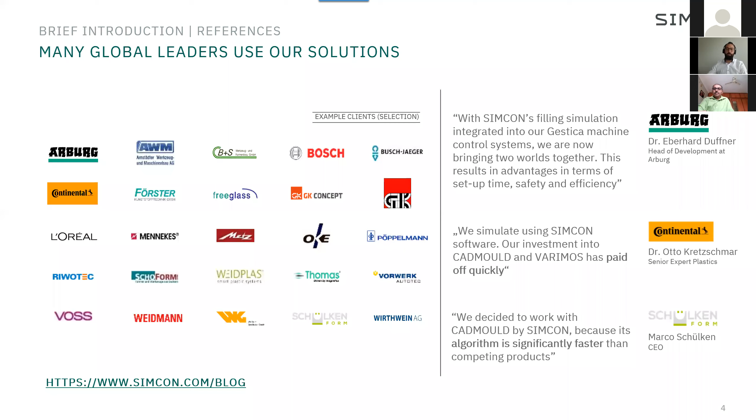So one of the next slides will show you what you will see today. We'll show you today how to combine simulation and optimization tools to really improve your injection molding results. And that means you should not only have the software on your side, but you should really use it in a proper way. And that is why I would like to show some things about it.

So we have CADMOULD as a simulation tool, and we have VARIMOS as an optimization tool. With CADMOULD simulation, you can, of course, already anticipate results very early, identify your issues, like, for example, weld lines, air entrapment, short shots, like warpage behavior. You can really see if the part you would like to produce will have the quality you will need, or if it will not have the quality.

And you can, of course, virtually try to do improvements. That means you can try to change the processing parameters. You can try to change maybe the wall thickness, so the design of the part, the mold setup. So you can try different things and will receive a new result, which might be better or which might be worse. With VARIMOS together, we will have an automatic optimization.

So that means VARIMOS will automatically search the optimized settings, the optimized solutions for your product. And that is something which is very important today, that you don't only know if your result will be good enough. No, you need to optimize it, of course.

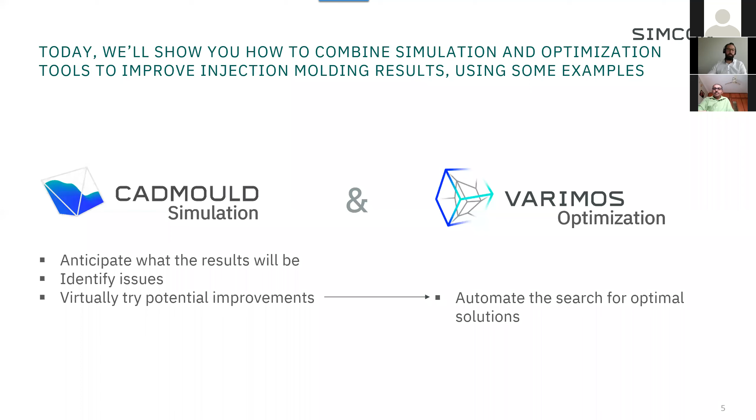I would illustrate it on an example, because that's the best way to show it. We will illustrate it on two examples today. We will have on the left side an example of a drink dispenser from company Brita. So it will be not the drink dispenser, but it will be the filter on the drink dispenser. There we did a geometric optimization, especially on the warpage behavior.

And on the right side, you can see a glove compartment. This is a part which is done in a natural fiber component material. And we will see what we did in a project, because in a project we developed the fiber orientation model. We did some thermal optimization as well as some filling optimization. And those are the two parts where I would like to explain to you the possibilities of simulation and optimization.

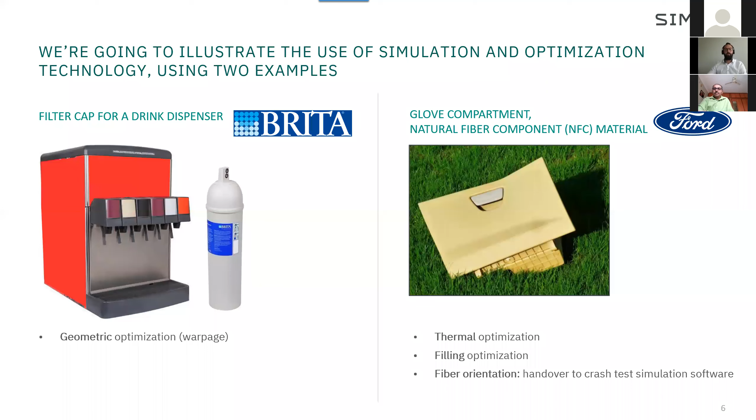For the first example, the Brita case study with these filter parts. What you can see is you have a filter which is used in many drink dispensers for the water purification. And this filter is a pressure sensitive part because the water needs to be filtrated, and it could have a high pressure, and therefore the part, of course, needs to be designed in a very good way, and it needs to resist the pressure.

We have very tight tolerances, especially due to the reason that this filter is built up by two parts. So you have a bottom part and a cap, and these need to be welded together. And that is something which we will see in the later slides, which caused some issues, and where we helped to optimize this part.

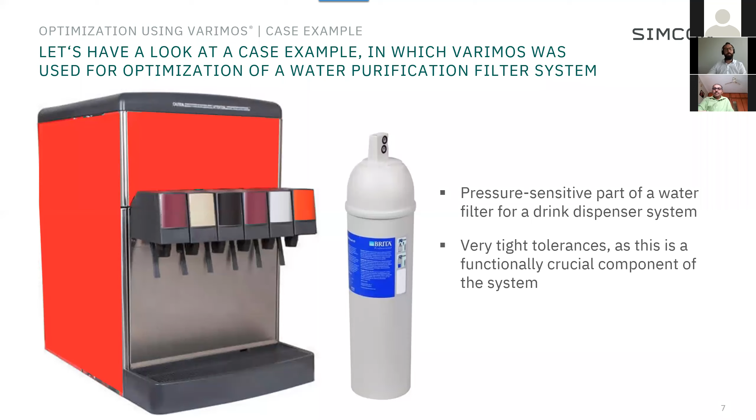So the challenge was we had a crucial part in the filter cap which was turning out distorted, which had too much warpage, and we saw that it was probably due to the unbalanced filling. So you can see that the parts are not filling balanced. You have an unbalanced filling.

You can see it on this side: this area of the flow front is not matching with this area of the flow front. So of course, if you inject from the center of the part and the part is not symmetrical at the top, you will not have a symmetrical filling at the bottom. The issue was that due to the fiber reinforced material, the resulting parts were too oval. They should normally be perfectly round, but they were not.

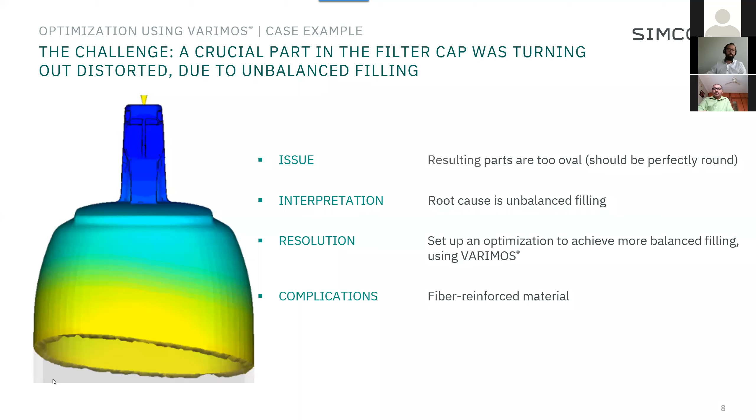Why do they need to be perfectly round? Because they need to be friction welded. So they need to be welded, and then it is a big issue when the parts are not round. So we had to solve this issue by simulation and try to find a solution where the thing can be balanced. To do this, we used VARIMOS, and therefore I would like to show you how VARIMOS can help you to optimize the geometry.

I will guide you through these steps which you need to perform, or which mainly are performed automatically by VARIMOS, and show you what will be the outcome. So first, you need to set up your optimization, of course. To set up your optimization, you can define targets, for example, the balanced filling. You can define free parameters, and you can define constraints, for example, maximum injection pressure, maximum clamping force, or something similar. The free parameters in this case were the geometry, so the wall thickness of the part. I will show you later.

Then you have some steps which are automated by VARIMOS. That means as soon as you have set up the optimization, VARIMOS will automatically set up a DOE, so a design of experiments, to do some simulations in the background automatically with CADMOULD. So it will simulate many variants automatically and get the results. And these results of the different variants will be taken into a mathematical model. And this mathematical model will be able to predict the best geometry distribution or the best wall thickness distribution in this part to reach a balanced filling.

So something which you could do manually, of course, to test different wall thicknesses will here be automated and will automatically give you the best result which is possible. Because even if you find a good solution manually, you're not sure that it will really be the best solution which is possible. So the computed optimized processing parameters, or in this case, geometry features, will be delivered to you.

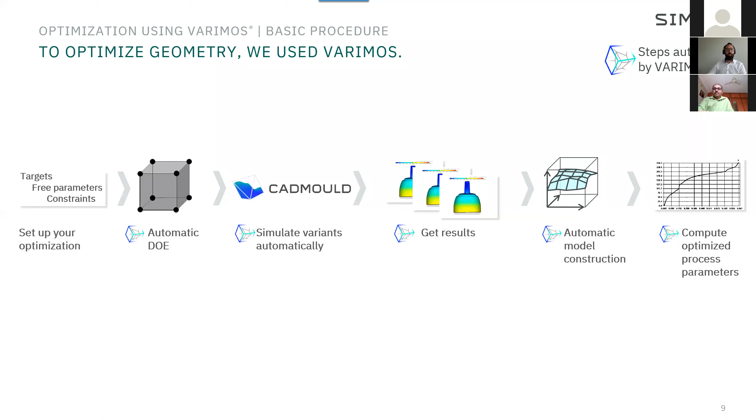So just to explain a little bit more detailed, for the optimization, you can flexibly define targets, constraints, and free parameters. So that means the system is not giving everything automatically, and maybe you are not finding your right targets, but you can define them. So the targets could be, of course, everything which is the outcome from a simulation. So it can be the geometry deviation, can be the cycle time, as we heard today already, that the cycle time is, of course, in today's production, one of the important points. Could be the temperature, the material usage, or anything else which is a target or a result from the simulation.

Free parameters which can be varied and optimized with VARIMOS in order to find a solution are all parameters which can be changed in the simulation. And in the simulation, if you compare it to the real mold existing on the injection molding machine, you have a lot more parameters which can be varied. So it can be the wall thickness on the injection molded part. It can be the location of the cooling channels, can be the runner system, can be every process parameter. So things you will not try on the machine, or you cannot try on the machine because you would need to build a new mold, can be changed in the simulation, of course.

So that means if you begin earlier in the product development process to optimize, you will have a better mold in your first production trials. And of course, there might be some constraints like some temperature restrictions, like some clamping force restrictions, which can be a limitation for your optimization.

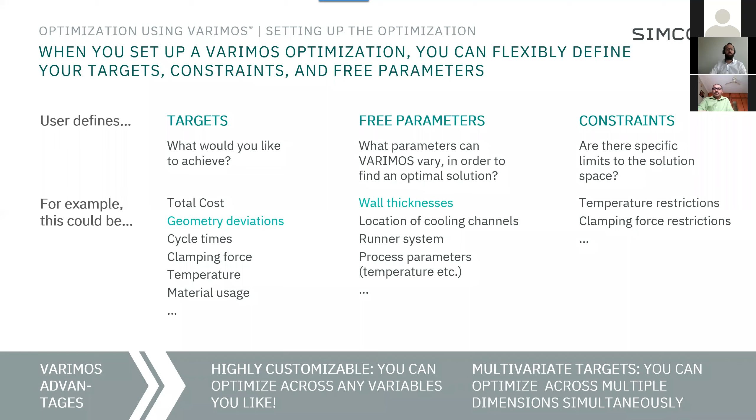That means the special advantages of VARIMOS compared to just simulation or compared to any other system are that you're highly customizable, so you can achieve your targets across many variables, and it can have multivariate targets. So also the targets you would like to fulfill are not limited, and are only limited to the results you can achieve from a simulation, but those are many results today.

So let's have a look how we defined the targets, especially on this part. So on this part, we defined the targets with some sensors. We wanted to have the flow front reaching these sensors at the same time. So that was our target, because if we reach these sensors at the same time, we will have a balanced filling. So, easily explained, those were the targets of the optimization.

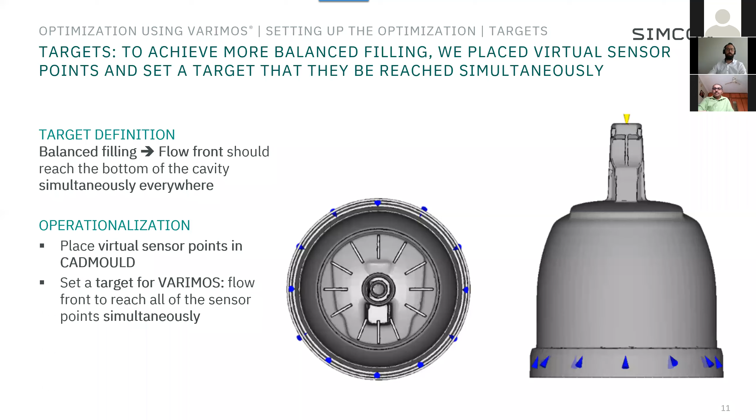Of course, now we need some free parameters. In this case, we defined as a free parameter some areas where the wall thickness was allowed to be changed. So we defined some groups on the part. Like you can see 1, 2, 3, 4, 5 groups on the part, where it was allowed for the optimization system to change the wall thickness, for example, plus minus 0.2 millimeters. And then in the background, VARIMOS was running these optimization runs with CADMOULD and giving out the best result.

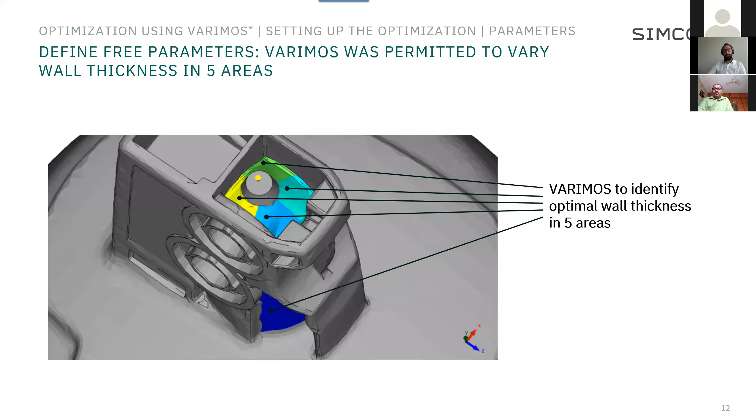There's one important point. The more parameters you change or optimize, and the more targets you would maybe like to have, that takes a lot of simulations in the background. Here, CADMOULD is showing its very unique selling proposition, because CADMOULD is the fastest simulation tool on the market.

That means the simulation time compared to other systems is much faster, and especially if you need, due to DOE, a large number of variants, CADMOULD can bring in its full potential. And that's why we can really optimize a part where other systems are maybe just doing one simulation.

And so that is what is becoming more and more important, that you really can do a full optimization in a very short time, because the time when you will have to deliver the mold or the part will get shorter and shorter in the next years.

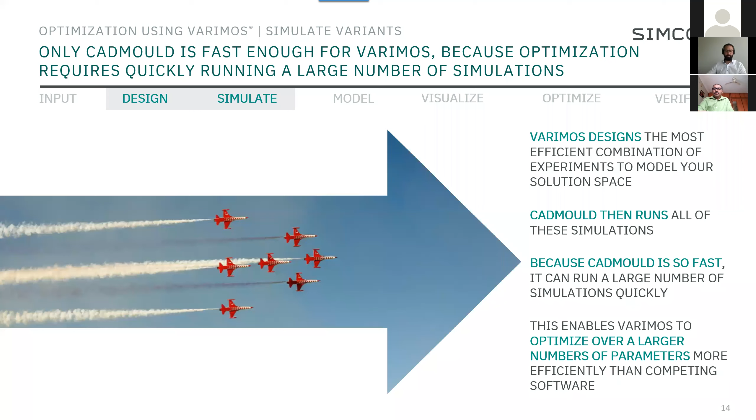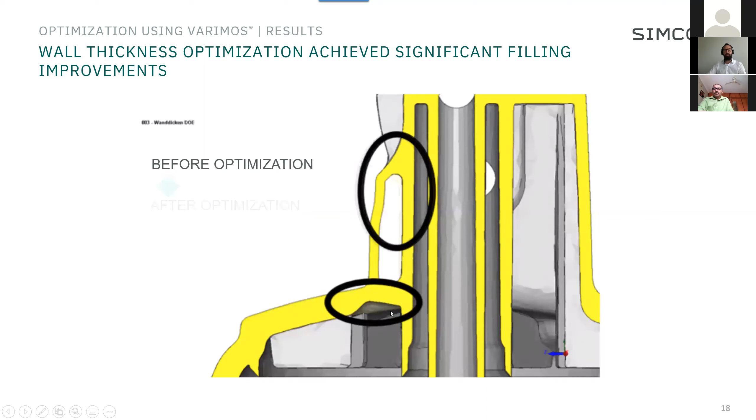Okay, so the result which was achieved with VARIMOS was that the wall thickness needs to be changed in some positions. You can see that, for example, in this position the wall thickness changed, here in this position the wall thickness changed, and that was suggested automatically by VARIMOS. And the result was that before optimization, you know the result already, but after optimization we have a nearly 100% balanced filling, which leads to a really better result afterwards.

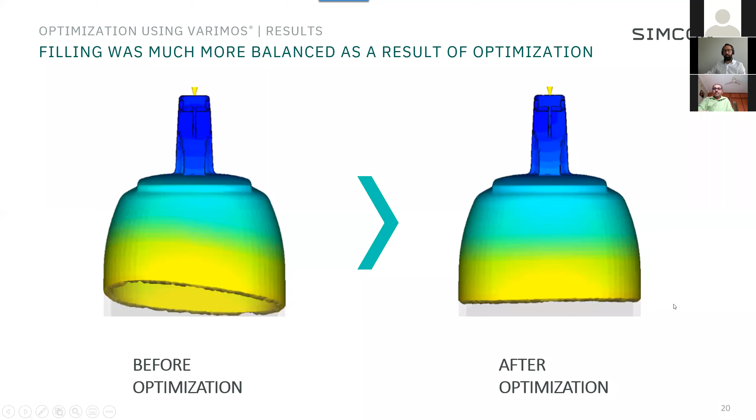So just by changing some wall thicknesses in the top of the part in a small way, which was allowed by the customer, we were able to really balance the filling in a really good way, and thereby also to achieve a much better warpage result.

And after the optimization, just by changing some small wall thicknesses and optimizing the filling behavior with the fiber-reinforced material, you can see that the roundness is much better afterwards. What was important was that the customer was able to really weld the part without any issues, which was very important for him.

And one other nice benefit or experience was that we suggested, of course, this mold design also with warpage compensation on this part. And directly after the first tryouts, the parts were ready for production, which is, of course, not a guarantee, but which is a very good achievement in this special project.

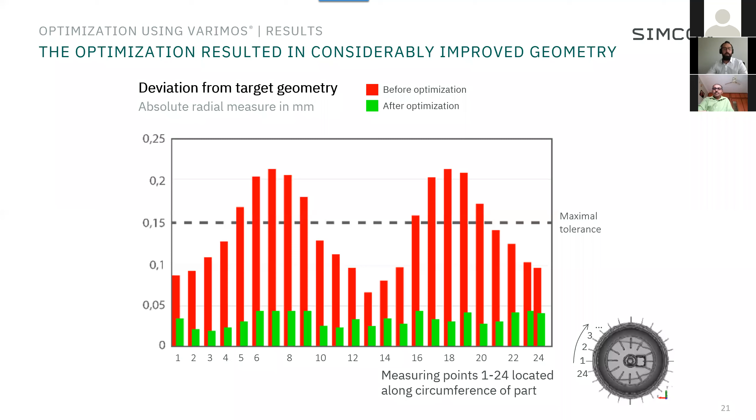In this project, we also achieved some significant cost reductions, because we were able to shorten the cycle time by 20% and to use 20% less material. To explain this a little bit more in detail, because the figures are quite high.

Due to this redesign of the mold, we combined the injection molding simulations with a structural analysis, so with a strength analysis. And this strength analysis combined with the fiber orientation from the injection molding simulation showed that the wall thickness of the main part was able to be reduced.

And so that's why we were able to save this high amount of material, and thereby, of course, also the cycle time, which in the end led to a return on investment on this whole project in only 4 months, and they spent more than 250,000 euros on these projects. So it was a really good example to show.

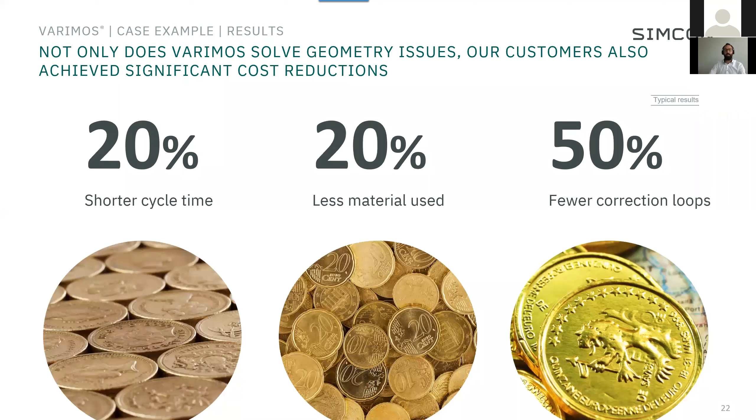So I would like to go over to the next example now, the example which is based on a natural fiber compound material. The glove compartment should be optimized, and the fiber orientation should be handed over to a crash test simulation. What I explained already at the end of the last example was the fiber orientation, which was used in the structural analysis.

Here, one of the targets was to really develop a fiber orientation model for these natural fiber compounds, because these natural fiber compounds with a matrix material of polypropylene and several fibers inside, not at the same time but tested, like sisal, cellulose, flax, all have a little bit different behavior, and especially different behavior than glass fibers. And so therefore, the fiber orientation model needed to be developed first in this project.

Other challenges were the filling optimization as well as the thermal optimization for shrinkage and warpage. This project was done together with, as you can see, really well-known companies like Ford, Fraunhofer as a very well-known research institute, and also MATFEM for the crash test.

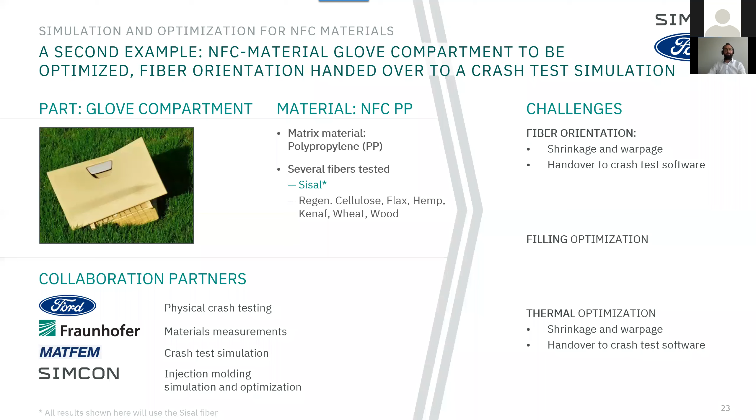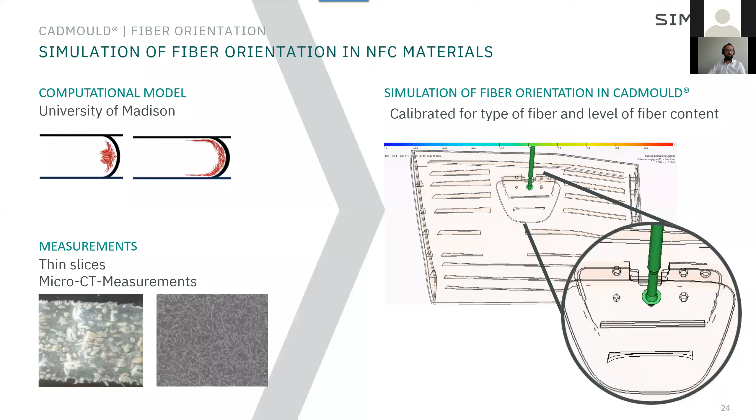When it comes to simulation of the fiber orientation for glass fibers, for long glass fibers, we were already able to do this. For NFC materials, as I mentioned, we developed this together in the approach. So with the computational model of the University, we did some measurements in thin slices and micro CT measurements, and of course then adapted and validated the fiber orientation model in CADMOULD

and calibrated it for these types of fillers and the level of fiber content, so that in the end we produced a simulation which was really able to predict the fiber orientation in this part, the cover of the glove compartment, in a very, very precise way.

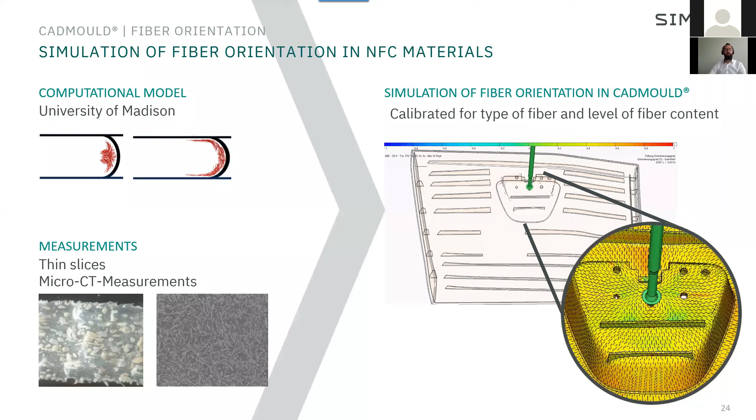Here you can see one more point. So we used the CT scans to verify the accuracy, and there was a test design. So this test design was molded in a physical test in different injection molding process parameters and so on. And then we were able to measure at 6 locations and in 7 layers the fiber orientation, and were able to compare it with our simulation results.

And as you can see on the right side in the pictures, when you see the measured fiber orientation direction, and when you see the fiber orientation from the simulation, you can see that they are matching very well. And that is just to give you a rough impression how fiber orientation can be measured, how it can be simulated, and how we calibrated it then together.

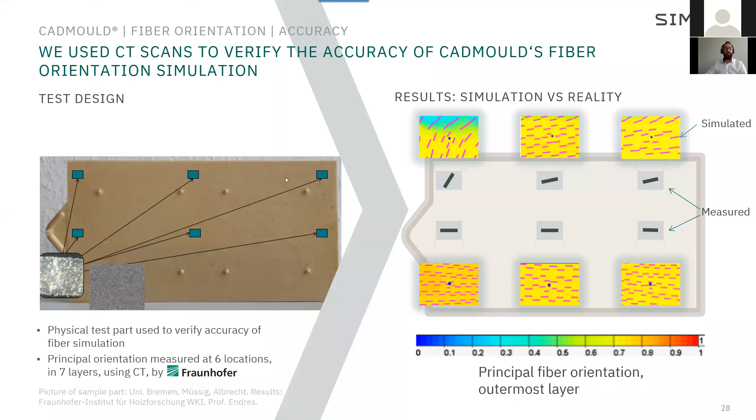Of course, it is not only about the fiber orientation. Today, the question will also be, how about the shrinkage and warpage behavior of this part? So the mold maker needs to deliver, of course, a very precise mold which can produce parts in the specs which are requested by the customer, and the injection molder also needs to find the perfect process settings which are able to deliver these results.

If you do a simulation in front, of course, you will already know what your warpage is looking like, and you can see that in this example, also with natural fiber compounds, we really were able to achieve a very precise warpage forecast for this part. You can see that in Z direction, the warpage simulated with CADMOULD was 3.4 millimeters, and the measured warpage on the real part was afterwards 3.5 millimeters.

So for this kind of natural fiber compound, the word natural means also the deviation of the fibers is of course bigger than the deviation in, for example, a glass fiber compound, because the fibers are a natural product. And so based on this background, 0.1 millimeters of deviation in this case is already very, very good, and was enough for the customer.

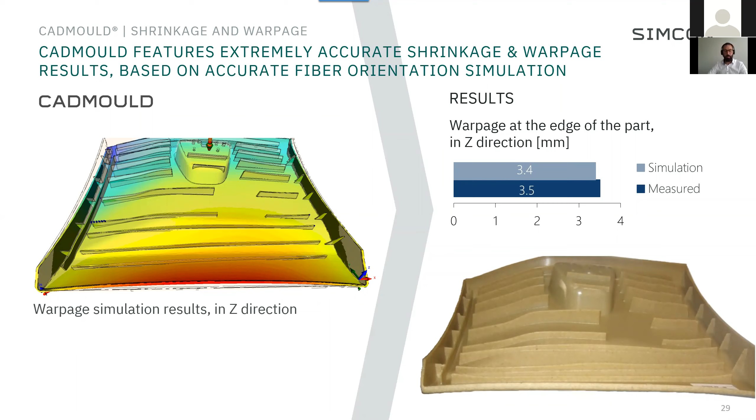The second point I already mentioned was the crash test simulation, and the real crash test to compare it. Here we got the support from Ford. So Ford did the crash test on this part, and we did together with MATFEM this crash test simulation based on the fiber orientation exported from CADMOULD. So with CADMOULD, you can export the fiber orientation directly, for example, to ANSYS, Abaqus, LS-DYNA, and so on.

So that means you really can bring in at an early stage of the product development some results which might help, as we have seen in the example before, to reduce the weight of the product and thereby also cycle time. Because if you can save material in any area, because you know that the strength is good enough due to the fiber orientation, you will be able to save this material and thereby save costs, of course, and save the environment.

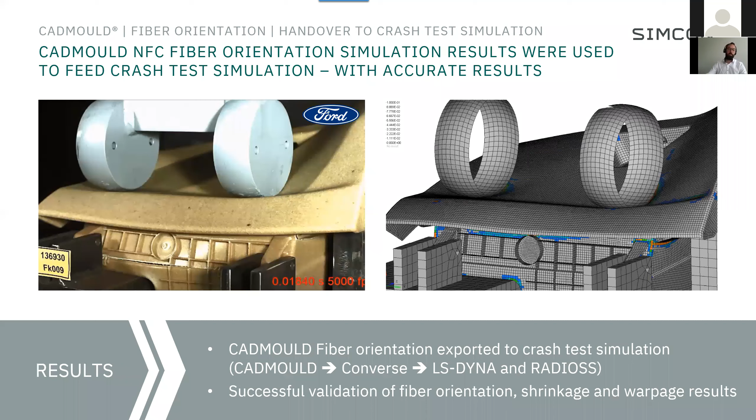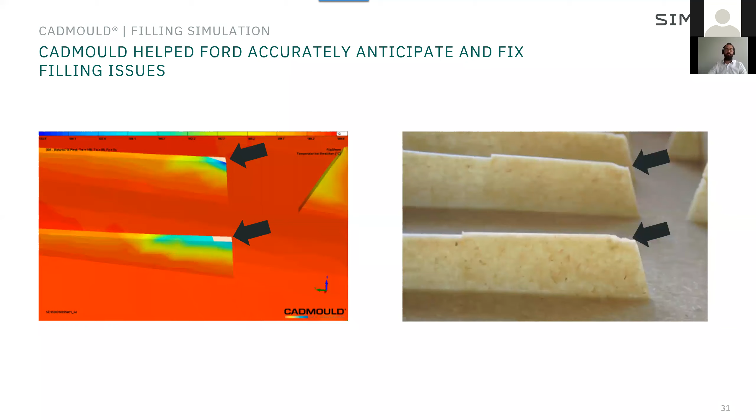One other issue which showed up during the simulations was that there will be some filling issues in the real part. That already showed up during the simulation, and the first trials showed the same results. You can see these ends of the ribs, so these corners of the ribs were not filled completely. One reason was the thin wall thickness, combined with the fiber orientation and the low temperature of the material used in these first steps. So there are some parameters joining together which caused these issues, but we were able to find a solution for this.

For example, we did it together with IFBB in Hanover in Germany for biopolymers. We have one partner in Finland which is producing a material which is based on a wooden filling in the material.

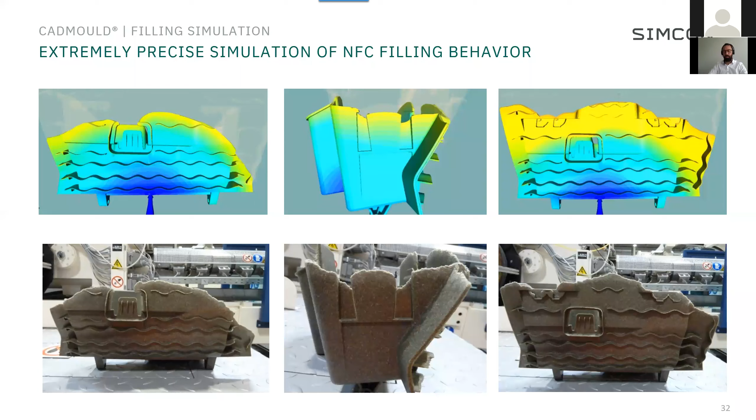So when it comes to optimization on this example, we optimized the discoloration of the parts, and therefore we used VARIMOS for the physical sampling. Until now, I explained that VARIMOS is available for the optimization based on the simulation tool CADMOULD. But VARIMOS can also run optimizations by physical sampling.

So that means you will also set up your optimization, means target, parameters, constraints. You will receive from VARIMOS an automatic DOE setup, and then you will have to produce these variants physically on your existing mold and on your existing machine. So when the mold is once created, you will go on the machine and do the first trials like VARIMOS suggested. And then you will have parts produced which you can measure.

In this case, it was necessary because the discoloration of the parts was not able to be simulated, because the discoloration is no result in a simulation. The discoloration is an issue of maybe some temperatures, for example, and that is what we wanted to discover in this case by physical sampling. After we have measured the color of the parts, we were able to build an automatic model and to compute the optimized process parameters.

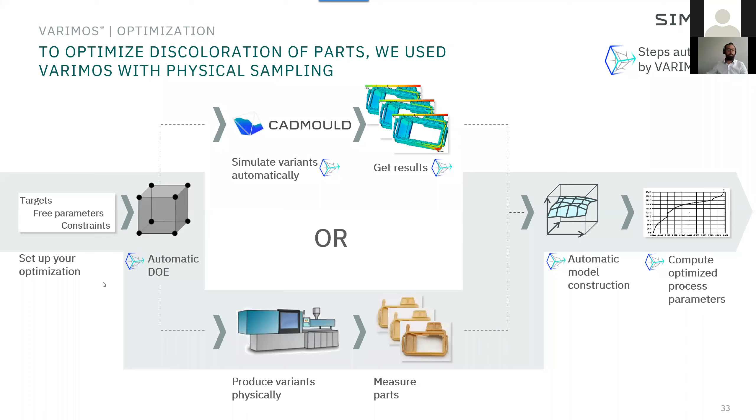So how does this work? To go ahead, we had the setup of the simple optimization, so we had optimization. So we had to minimize the discoloration as a target. The free parameter was the temperature, and the temperature must be in a certain target area. Why was it the temperature?

Because the discoloration comes from kind of material or natural fiber compound which is burned. So the fibers will start to discolor when the temperature is getting too high in the material, and then they will have this color which should not be there, and which will of course reduce the quality of the natural fibers and thereby also the strength. So the target was to have a more or less not discolored part, and that's why we wanted to find out the best parameters for this.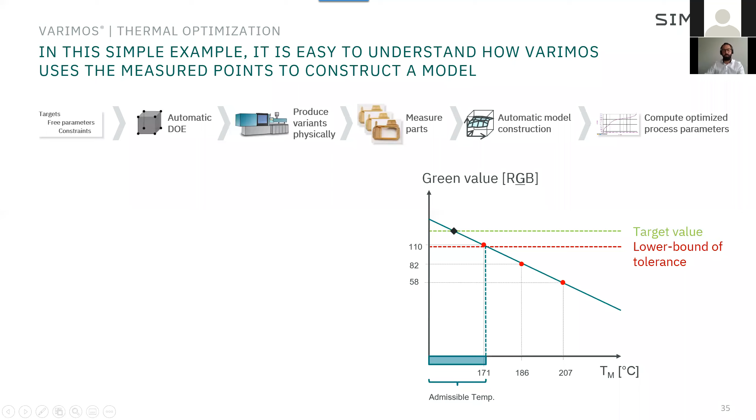So on the next slide, you can see if we take two quality criteria, for example, the peak temperature and the pressure, and as a free parameter, the temperature, it will get more complicated already, because you would like to fulfill two constraints. As you can see, the target value should be as low as possible, because if we have the filling pressure as low as possible, it will be better for the selection of the machine. And if we have the temperature as low as possible, it will be better for the discoloration of the part.

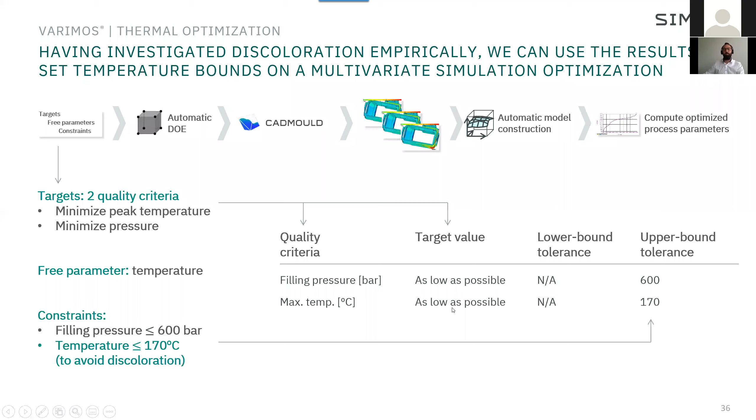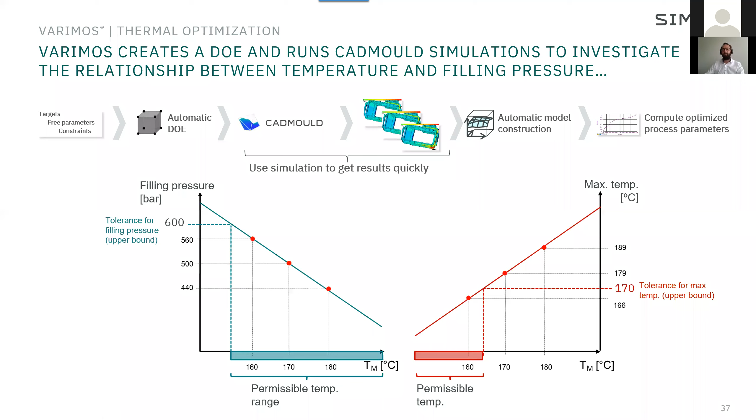And now you can see that VARIMOS will automatically find out which parameter range will be applicable for which result. So for example, for the filling pressure, it will of course be better to have a higher material temperature. For the maximum temperature in the part, it will be better to have a lower temperature. So the permissible temperature range is not fitting very well together, but there is a small range where it is fitting together and where you can fulfill both of your targets.

And this feasible zone was then found based on these real tryouts we have done together with VARIMOS on the real injection molding machine. And that is something we used later in the simulation to do the optimization together with CADMOULD. So then together with CADMOULD, we were able to predict this.

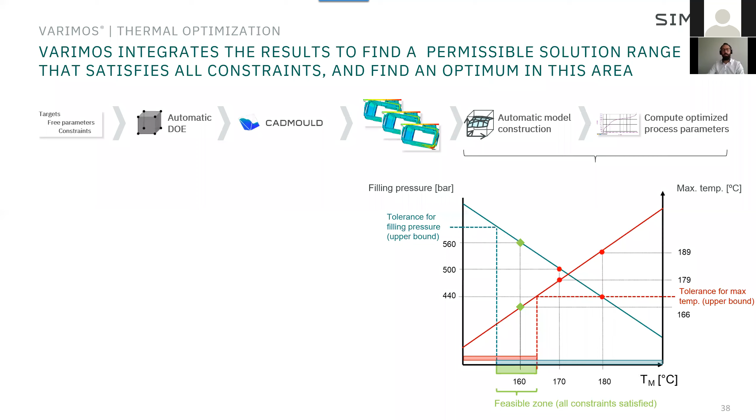And just to give you a look how this looks in our VARIMOS cockpit, I would like to show you the VARIMOS cockpit in real. So that looks like this. One moment. Okay, here you can now see the real VARIMOS cockpit. So that is the cockpit of our optimization tool.

And you can see on the left side the process parameters like the filling time, the mold temperature, and the melt temperature. So in this example, we took some more free parameters, and we have the quality features on the right side. So you see the maximum flow front temperature and the maximum temperature, because these temperatures were important to not discolor the part. And we have the maximum pressure.

Additionally, we took some dimensions, for example, some measurements on this part, the length, the width, the flatness of the part. Red dimensions are out of the tolerance, like you can see, so they are above the tolerance or below the tolerance. The other ones are inside.

And so now you can see directly, if you change any parameter, how these measurements are moving. So the quality features will change. So by just changing the filling time, you can see that there's not a big influence. By changing, for example, the melt temperature, you can see that there's, of course, a big influence on the maximum flow front temperature. So if you raise the temperature, you will have a higher temperature, and the opposite side again. And also the mold temperature will have a small influence on some parameters.

But you will not be able to find the optimized result like this. So therefore, we have the optimization button. And when you once click the optimization button, you will get a result which will fulfill all of your targets, and you can see that these are the best settings. So not the lowest filling time, but a little bit more, so 1.1 seconds, but the lowest mold and melt temperature will be applicable to have these results available.

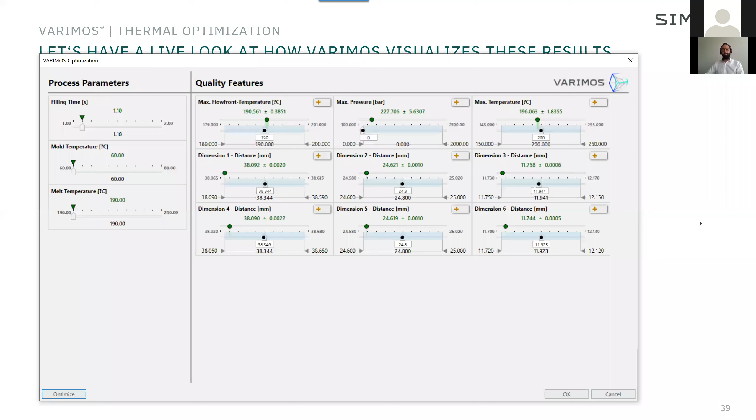So that is something which is very important, because you can have a proof of the quality of your mold already very early in your production process. So just to summarize the advantages of using simulation and optimization together, that means you will find better solutions. So you can optimize part, mold, and process automatically, and you are not limited in your targets. You will get really the optimal solution and not just a good enough solution, like you will maybe be able to do it manually.

And one of my favorite points is that you will also find unconventional solutions, because many of our engineers are very well skilled, very experienced guys, and they have a lot of knowledge. But maybe due to this high knowledge and experience they gained, they will not try unconventional solutions, which they maybe have seen in one project were not working, so they will never try it again. And our system VARIMOS doesn't know about these restrictions or these unconventional solutions, and it will test it.

Of course, it's tailored to your needs. As I explained, you can flexibly define your targets, and you can use simultaneous optimization over a large number of variables. One thing which I maybe have shown in the last slide is that it is easy to understand. So you will get the results in a very simple way. You will have this cockpit where you have the sliders and can directly see what will happen if you change any parameter, maybe on the injection molding machine or in other areas.

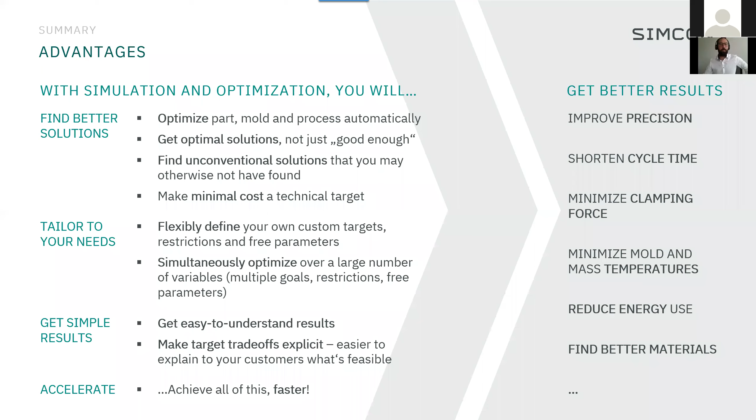And of course, one of the important points today, we can accelerate your product development process, your mold making, your injection molding, and you can achieve it faster by doing simulation optimization. And just to summarize it, the results which will get better are shorter cycle times, minimized clamping force, and especially reduced energy use, and maybe also finding better materials in the biocomposites or natural fiber composite area. That is the summary I wanted to give to you, and of course, maybe there are any questions.